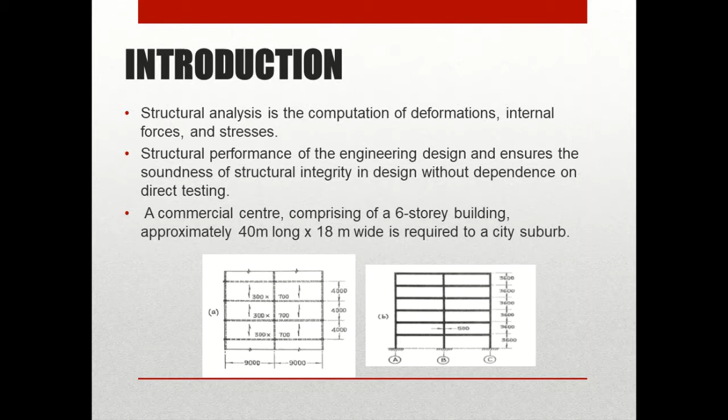Basically, in this project we need to discuss the consequences of the modeling approach with our assumptions, and suggest an extensive analysis of the building under various Eurocodes provision and load combinations with several subframe analyses.

From this project, the loading: the live load proposed for the ground and first floor is 10 kN per meter square. For the second floor it is 0.6 kN per meter square, and for the roof it is 0.3 kN per meter square. For the dead load, we calculate the service and finishes.

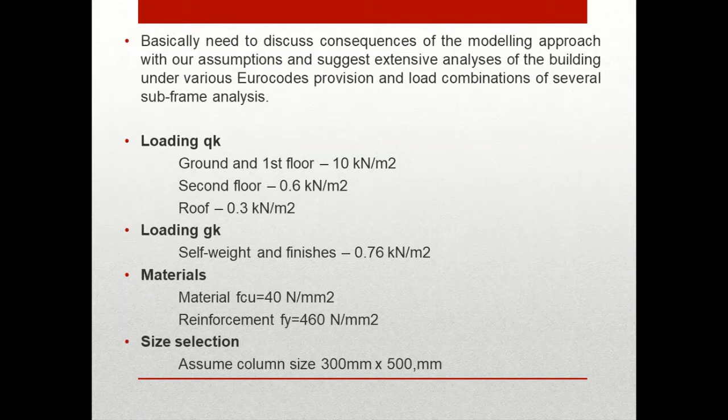We assume 0.76 kN per meter square, and the material for concrete is 40 N per millimeter square, with reinforcement at 460 N per millimeter square. For the column, we assume a size of 300 mm by 500 mm.

The problem statement of this project consists of 5 problem statements. First, what method should be used to analyze the 6-story building structure.

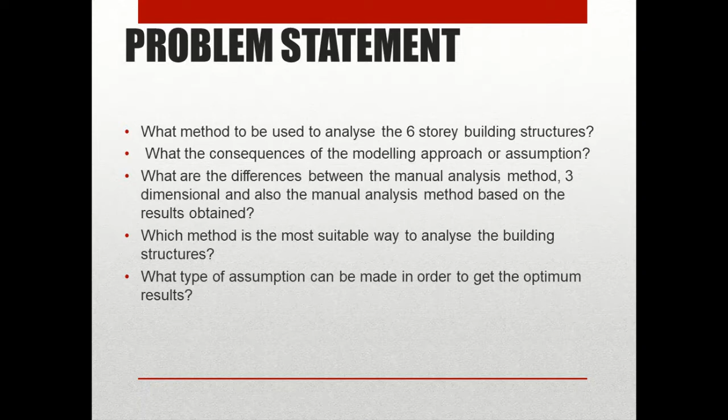Second, what are the consequences of the modeling approach or assumption. Third, what are the differences between the manual analysis method, three-dimensional analysis, and the results obtained. Fourth, which method is the most suitable way to analyze the building structure. And last, what type of assumptions can be made in order to get the optimal result.

The assumptions made are in order to ease the process of the project, since certain parameters and factors can affect the behavior of the structure.

An assumption we made in our project is the maximum distribution load of the beam is W. The red one is one-way slab, while the green one is two-way. So the red one is W and the green one is full W. We also assume the frame is symmetrical, and analysis will be made for one segment.

Next, we assume the value of modulus of elasticity is 2.0 x 10^8 kilopascal. FCU is 40 N per millimeter square, and FY is 460 N per millimeter square, using LINPRO and also SAP2000.

As for SAP2000, the dimensions of the column and beam have been neglected since we are more focused on the bending moment and shear of the structure.

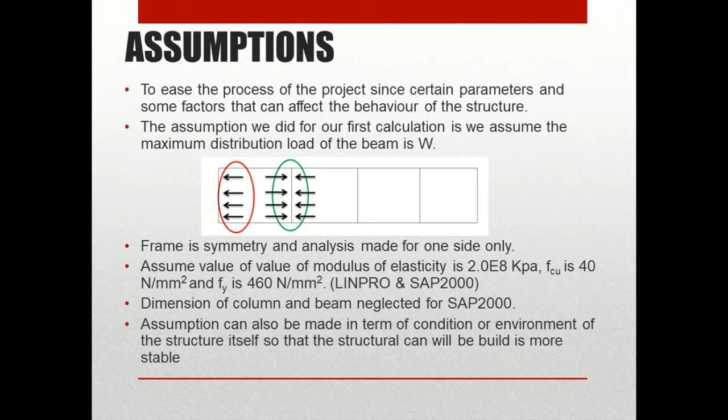I will explain more about the methodology that we used for our project. The first step is we did all the specification process, and gathered the information from the question.

The first one is about the QK and GK, and we must change the P with our team number, there is 2. We got the first floor is 1, second floor is 0.6, and the roof is 0.1, and our GK is 0.76. Then we show all the dimensions that we get about the slab, beam and column, and then we calculate the uniform distributed load to know the type of slab, whether it is one-way slab or two-way slab. Then we choose the code that we want to use for this project, and our team uses the code from Eurocode 2.

The value of n can be calculated by using the formula n equal to 1.35 GK plus 1.5 QK. You also can use British Standard by using a formula n equal to 1.5 GK plus 1.6 QK, but you will get a different value of n and different value of load. And then after that, don't forget to calculate the moment of inertia also.

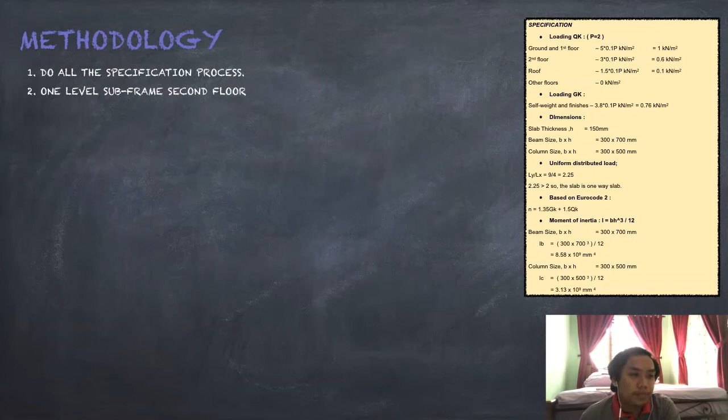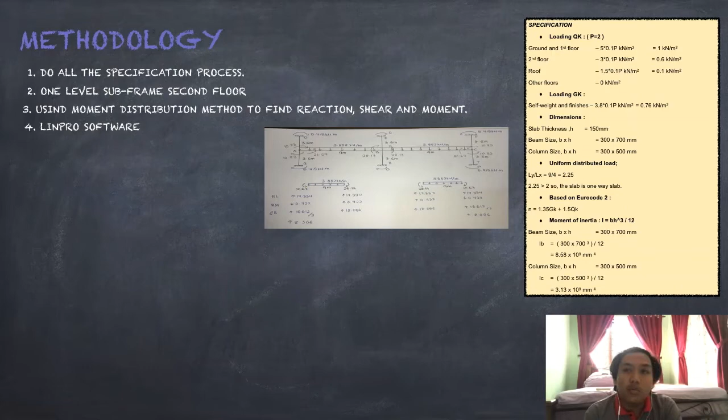And then I will get all the reaction, moment and shear for my structure. To compare my answer, I can use the first one, LINPRO software, that is more for 2D, just as the picture shows.

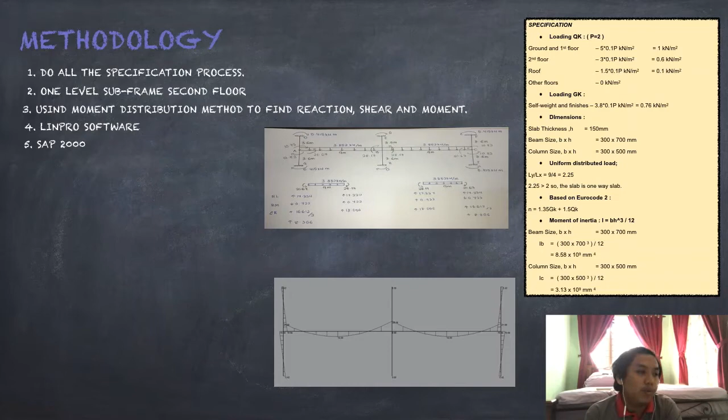The second one, I also use SAP 2000, but this SAP 2000 is more for 3D structure. It's more complicated to use than LINPRO, such as the picture.

Okay, the first one is specification process, the second one is one level subframe, and the third one is moment distribution method, the fourth one is LINPRO, and the fifth one is SAP 2000.

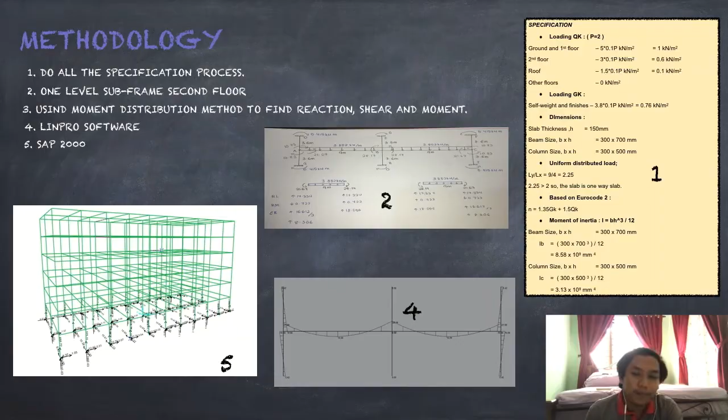For the comparison, I use the moment to compare the value that I got, rather than using the shear and reaction, but we also can use both of those. I prefer to choose moment. As you can see at my table, there are only 4 members from the structure that have the same value of 0 moment, even though we use different methods - Linpro software and manual calculation - both have the value of 0.

You also can see at member DA and GA, there are only 0.005 kilonewton meter value of moment difference between these two members. That is quite low, I think. So I think this error maybe occurred due to human error that I made during the manual calculation process. Maybe I did not round off the decimal places in the same way, so I got a different value, but it's not too high. Let's see the percentage error.

Percentage error is actually the comparison between the value that is derived from the experiment with the exact or true value. However, in our project, the values from the Linpro software analysis were assumed as the actual value, while the value from the manual calculation through moment distribution method, I assume as the estimate value. The formula is: manual calculation value minus software analysis value, divided by software analysis value, times 100, and you will get the percentage error.

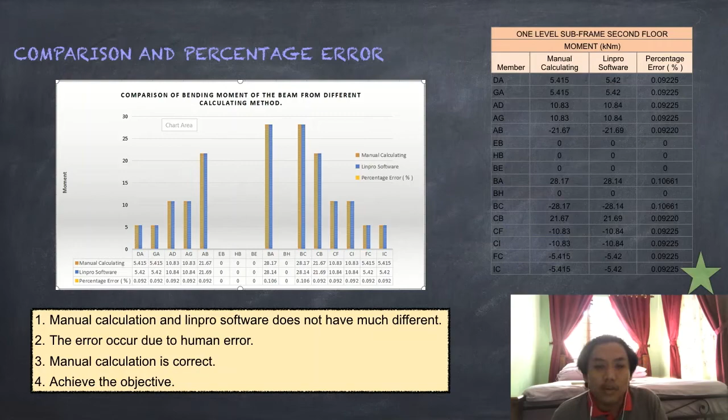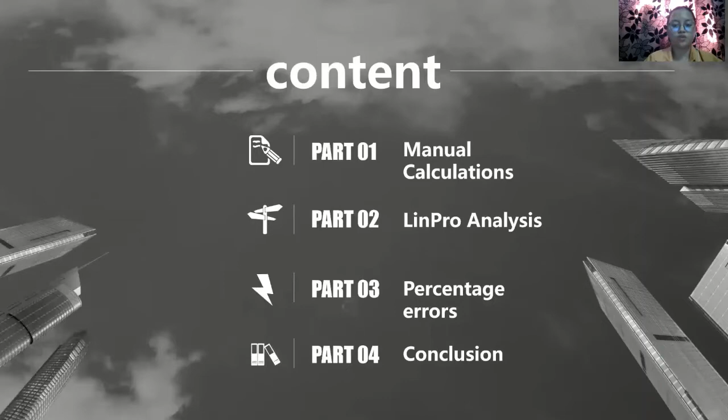Today I'm going to present the results of our reports for the ground and first floor. This is the content of my presentation: the briefing about the manual calculations, then LinPro analysis, and lastly the percentage errors.

The first one is manual calculations. In manual calculation, we are using the moment distribution method to analyze our multi-story frames. The codes we are using are Eurocode 2 and British Standard, but overall we are using Eurocode 2.

The value of that load, GK, in Eurocode 2 is much lower than in British Standard. This clearly shows that by using Eurocode 2, it could save more money and also save time. But in British Standard, its dead load factor is 1.4, which is a little higher than Eurocode 2. British Standard is more safe, but it's also more costly.

We could also see that our uniformly distributed load is for a one-way slab, because our length is much longer than our width.

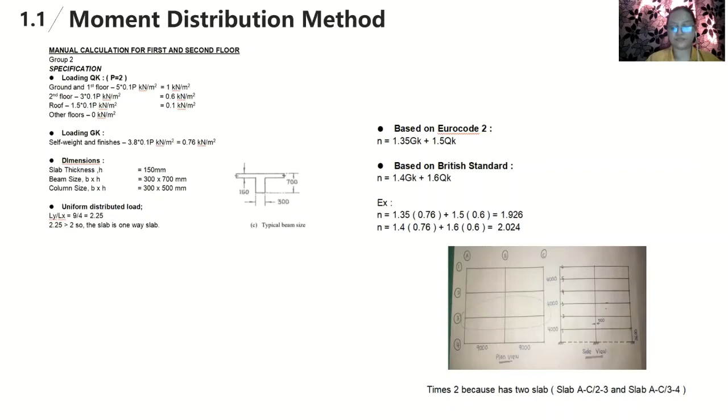This one is for the overall buildings comparing Eurocode 2 and British Standard. We can see that the value of N in Eurocode 2 is much lower than British Standard. As I mentioned before, Eurocode 2 is more economical because its dead load factor is only 1.35, which is a little lower than British Standard.

We analyze these multi-story buildings using the moment distribution method. This method is very suitable and easy to use to analyze statically indeterminate beams and rigid frames, because all the joints of these structures to be analyzed are fixed.

So we calculate the fixed end moments. At this stage, the equilibrium is not yet achieved, so we have to distribute it iteratively and get the total moment until equilibrium is achieved. When the total moment has achieved equilibrium, we can see that the distribution is zero, meaning it has achieved its equilibrium.

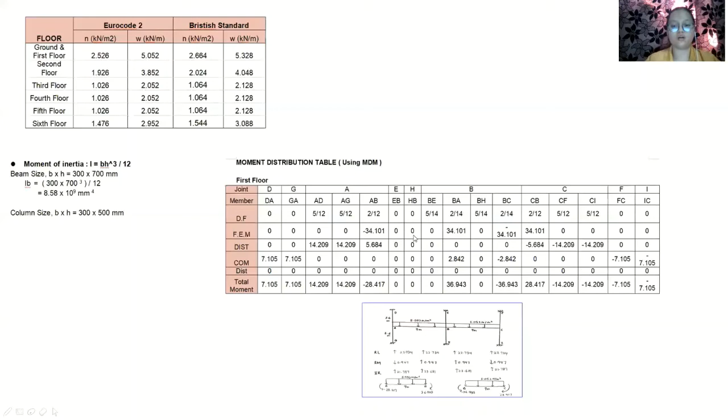So this is the direction of the calculations for the ground and first floor.

Next is LinPro. Here are the results of our LinPro analysis. We're assuming that our modulus of elasticity is the same as LinPro's default. We're going to compare these LinPro results with the manual calculation results after this.

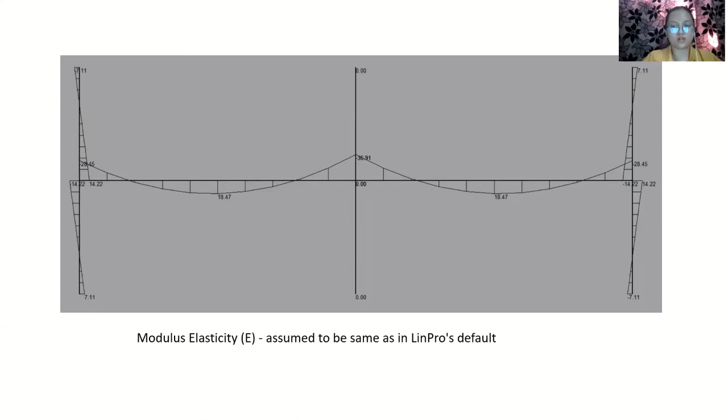Next is percentage errors. We could see this here, comparing the manual calculations with the LinPro software results. As you can see, the manual calculations are a little bit different from the LinPro software.

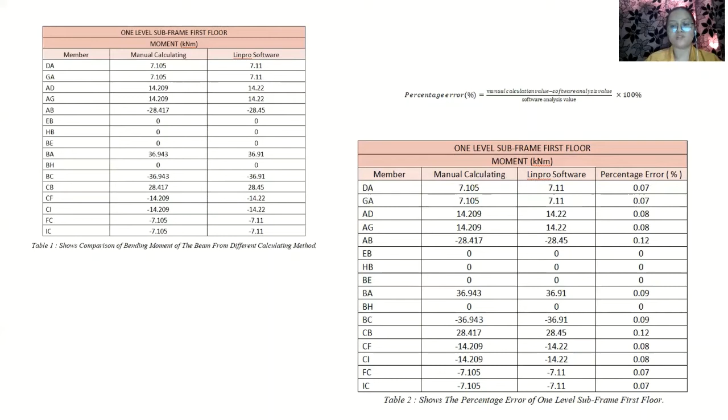This might be due to the fact that in manual calculations we are using 3 decimal places, while the LinPro software analyzes using 2 decimal places, so it might have a little bit of error. All the errors are less than 0.2. This shows that our objective is achieved, where our manual calculations, verified with LinPro software, are correct and almost the same.

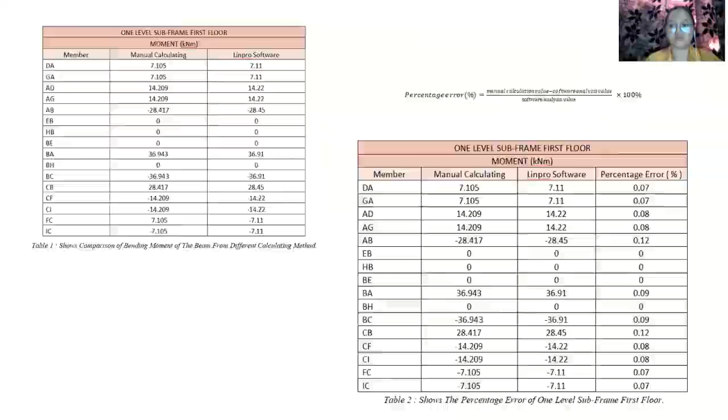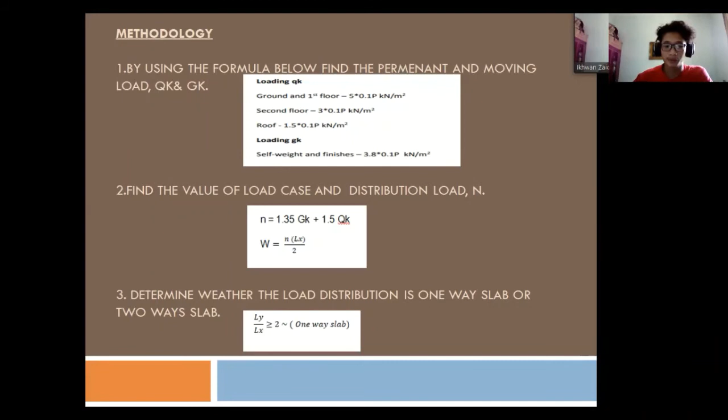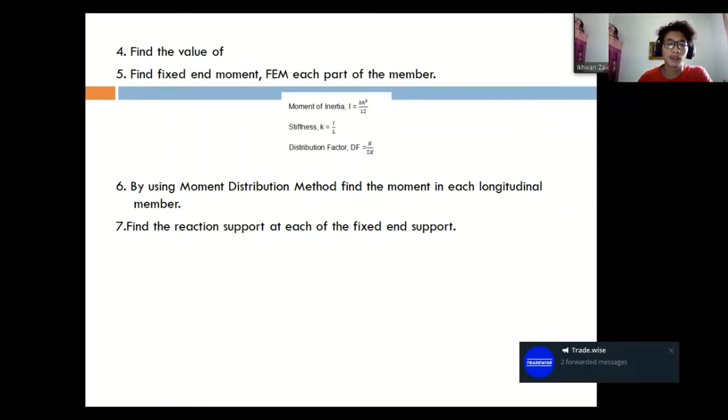By using the moment distribution method, MDM, we can find the moment at each longitudinal member, and after that we can find the reaction at each support, and compare it with LinPro and SAP 2000.

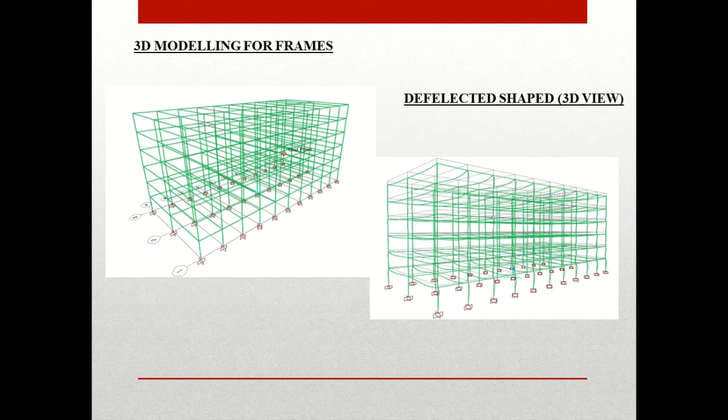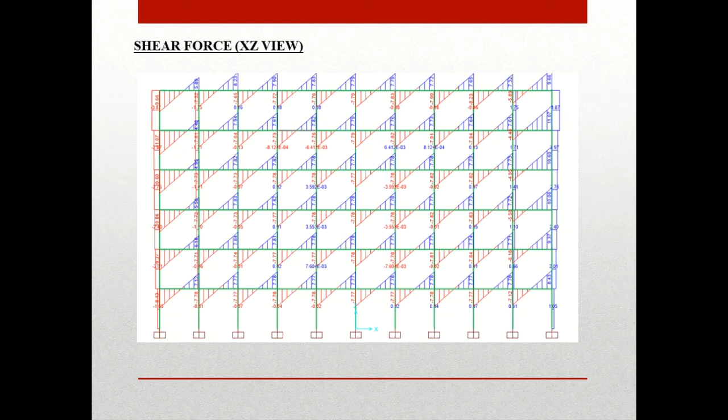Okay, next, here we can see the shear force of the frame in the XZ view. The force from the roof is the highest one compared to the ground floor and compared to the first floor.

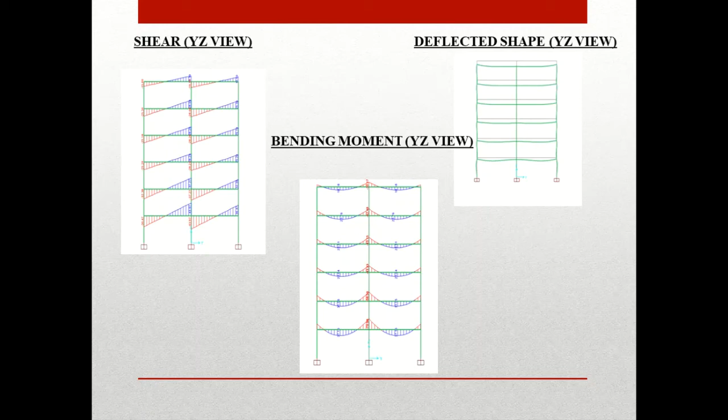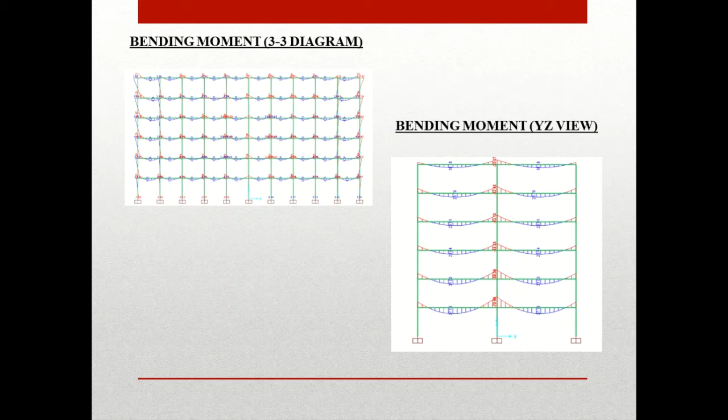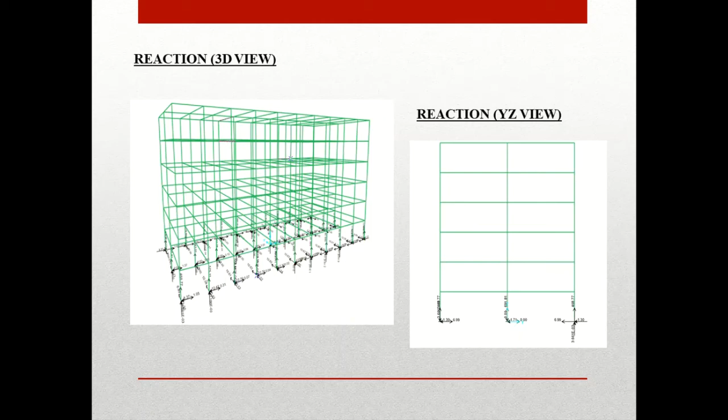Okay, that's all. For the methodology, the 2D analysis and 3D analysis is important to this course because it is to get the information, especially in the multiple part of the design, and it's important to find the shear force and the moment happening in each member, and the reaction at the support.

There are certain differences between 2D and 3D, which is 2D can only has the axis of X and Y, while the 3D can have the axis of X, Y, and Z.

Next, the 2D can only find the information from the front plan and the side plan. Meanwhile, the 3D analysis can discover information at any side of the structure in three-dimensional.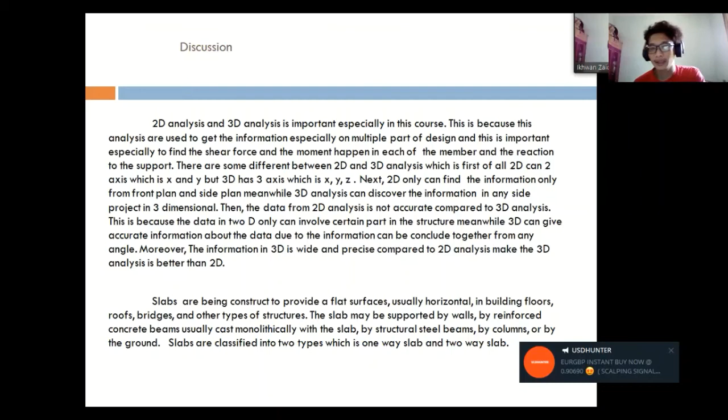The data from the 3D is more accurate compared to 2D. This is due to the 2D only can involve a certain part of the structure, meanwhile the 3D analysis can involve any member in the structure. The information in 3D is wide and more precise compared to 2D analysis, making it better than 2D.

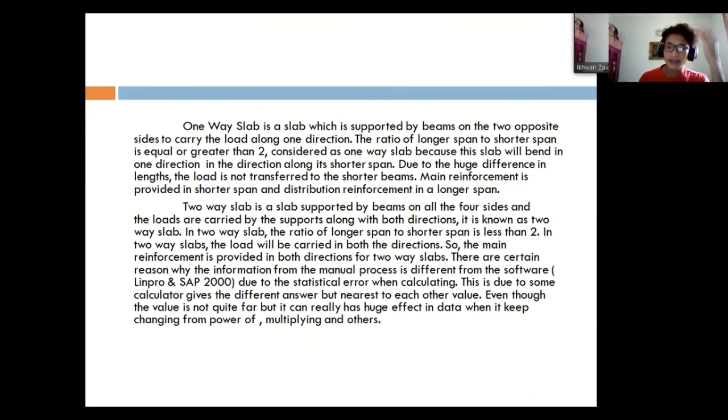Okay, there are certain reasons why the manual calculation and the software calculation has the difference in value. There are certain reasons why the information from the manual process is different from the software, Linpro and SAP 2000.

Because as we know, the software information is more accurate compared to the manual one. This is due to the statistical error when calculating.

This statistical error happens when the calculator gives a different answer, but it is nearest to the value. Even though the value is nearest, it can have a huge change when the value is changing from the power of multiply and others.

And the other reason is there's maybe some error when doing the moment distribution method. As we know, when we do the moment distribution method, there are certain values that need to be changed, like the negative and the positive integer, and maybe due to the error when distributing the data.

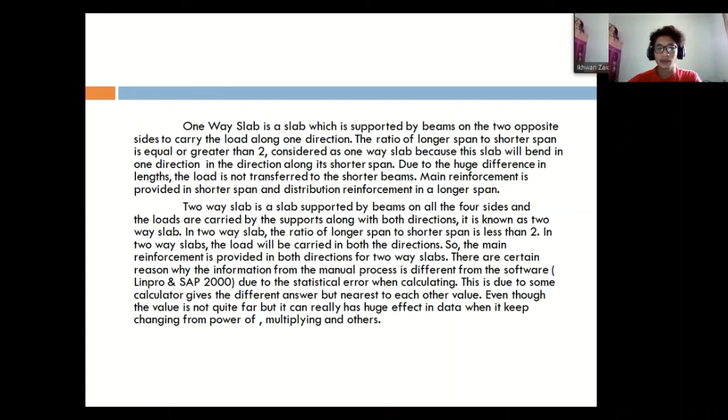We conclude that to our client, we could say that if they want to, they could choose whether to use Eurocode or British Standard because both have their pros and cons. And we could say that if they want to save more money and time, they could use Eurocode too.

And if they want to provide a little bit more cost, they could use British Standard. And here also we could say that the use of software is very convenient, and it's much easier and saves our time.